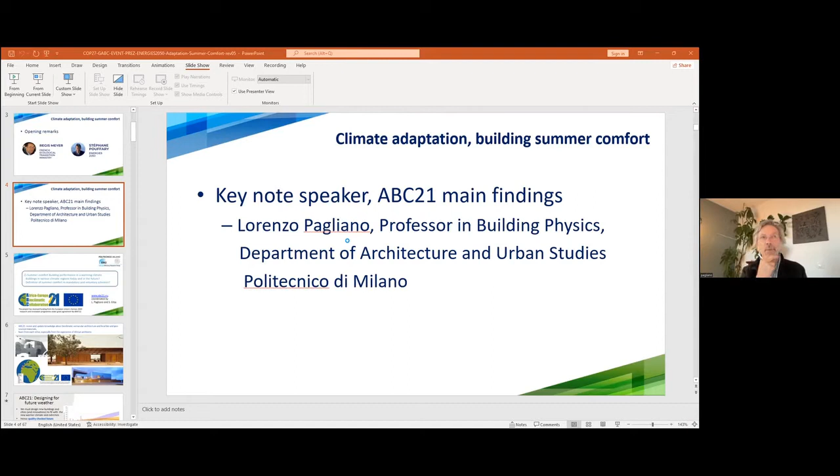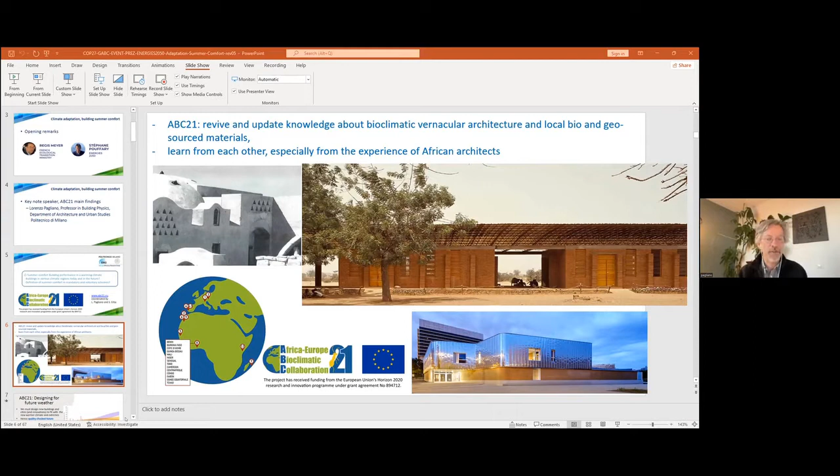In any case, this project involves a number of countries in Europe and in Africa, both academics and ministries, and also practitioners, architects and building construction.

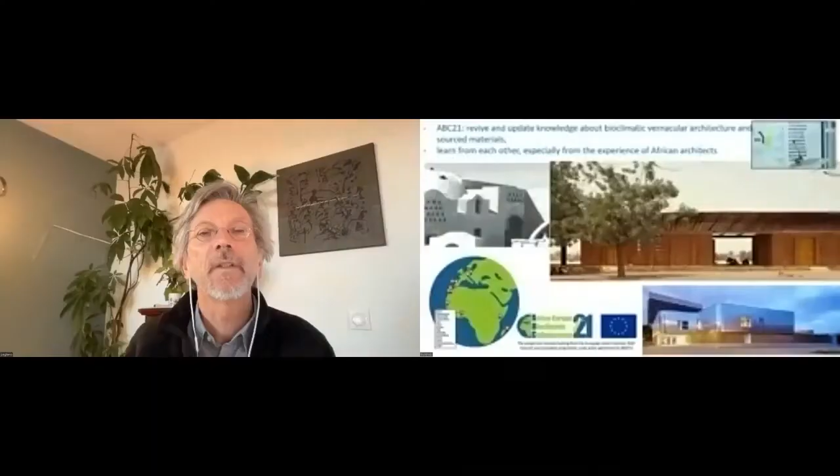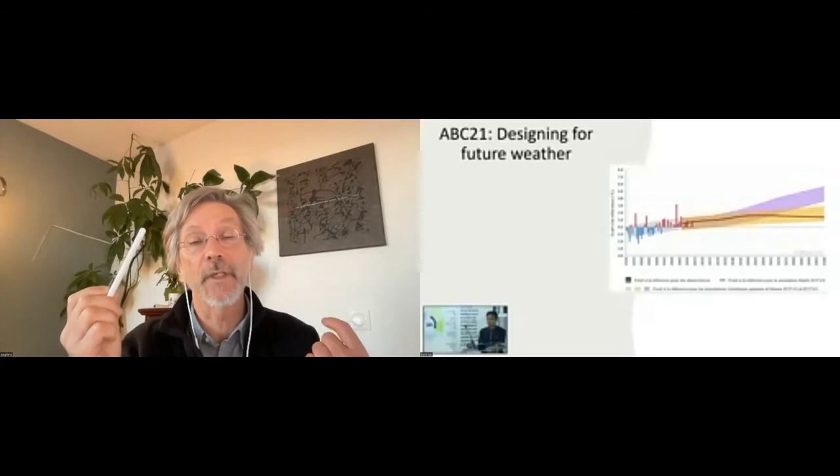One of the goals is to design for the future weather. For this, we need to anticipate what will happen in the next decades, rather than using as input for simulation and calculation weather data referring to the past, as it happens mostly today. We need this description of the future weather, accurate or approximate, and available publicly and certified publicly.

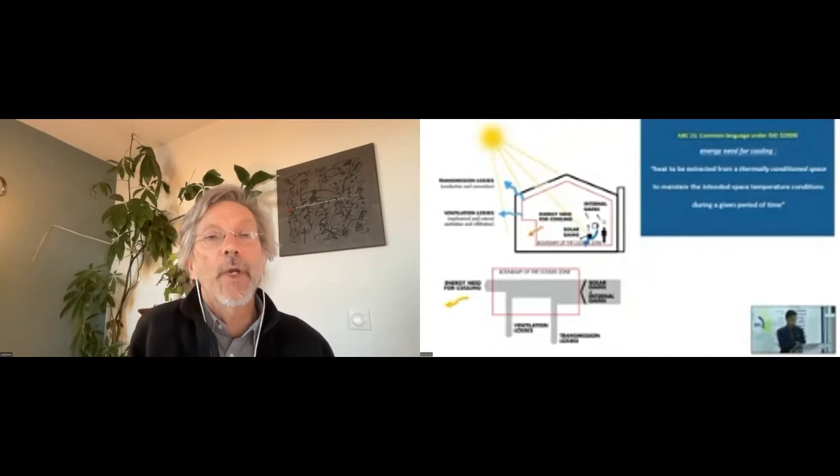There are some building codes which already use these indicators, energy needs for heating and cooling. For example, in Morocco, the building code limits the energy needs for heating or cooling, focusing on the envelope, as it should be, for a number of reasons. In Switzerland, it is mandatory to have a low value of energy needs for heating, and mandatory to have solar protections and minimum thermal mass, and only after that do you have permission to install active air conditioning if still needed.

There is another parameter called net zero energy or net zero CO2 balance over a year, which is sometimes used in a misleading way. If you do a virtual balance over a year, you can get zero, taking the difference of the energy the building uses minus the renewable energy generated at the building site over a year. But in the different months, the balance is not there, so you need seasonal inter-storage - storing energy today and using it six months later. This requires a lot of materials, land, and implies losses which in many cases are not counted into this paper balance.

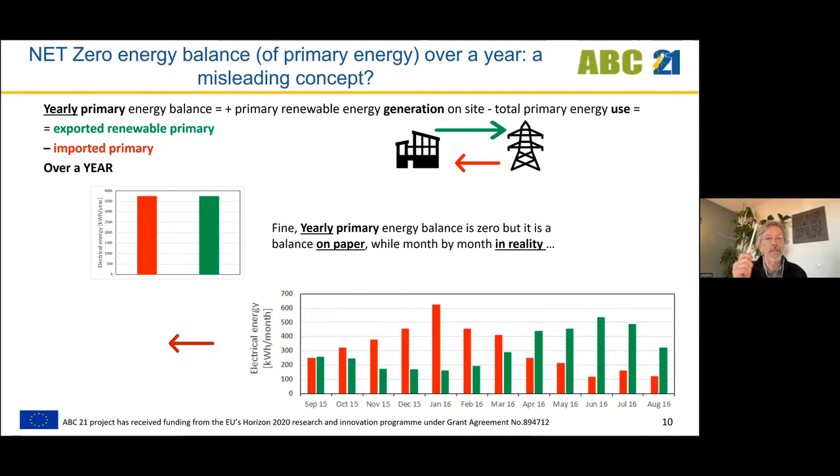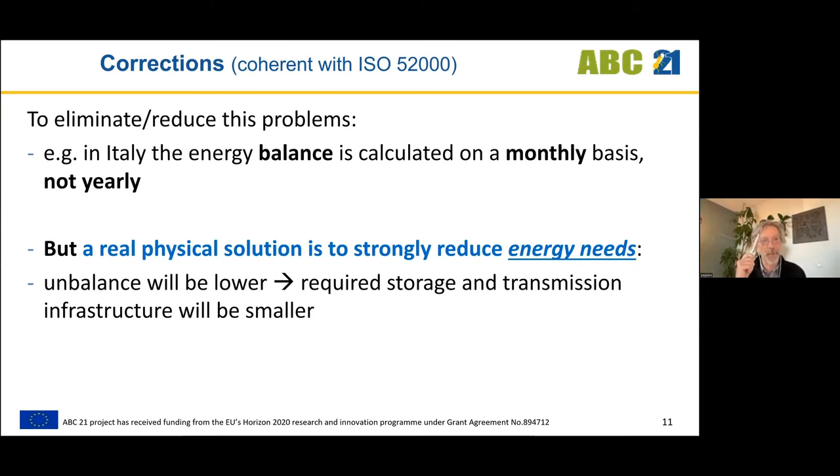We are already on the next point with the corrections I was proposing: calculate on monthly or hourly basis. What's needed is to reduce the energy needs with a very good building envelope.

We also need to use comfort indicators. What is done to define comfort is to do simultaneously measurements of temperature, air velocity, radiant temperature, and interview people asking how they feel at this time, requiring an answer standardized on a scale from cold to hot.

Tens of thousands of these interviews have been done and are collected now in the ASHRAE Comfort Database 2nd, published in 2018. We have participated in this work. In Africa, we will add new data with new measurements we are running now under the project ABC21.

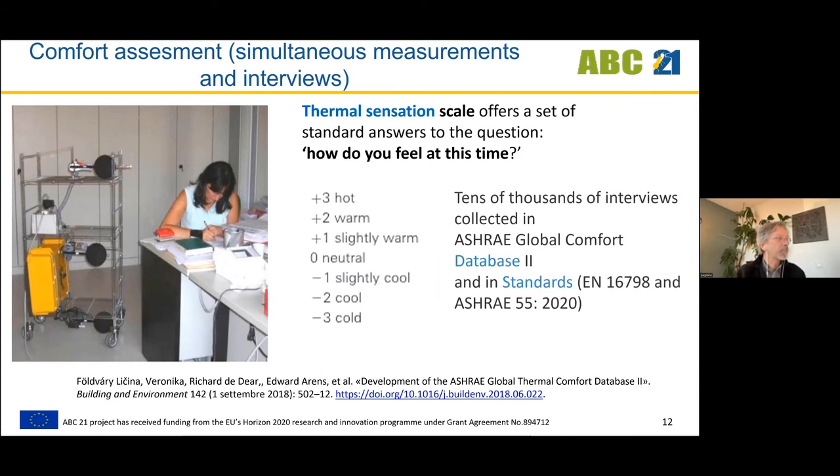One important parameter is air velocity, shown by these measurements and interviews. We knew from experience that if we have air velocity indoors, the comfort zone goes to higher temperatures. So you can be comfortable at 28 degrees with air velocity as much as at 24 with no air velocity.

This is an example of a building in La Réunion where, in the classrooms at the upper floor, there is cross ventilation to provide this air velocity, along with ceiling fans. At the lower floor offices, they have available cross ventilation, ceiling fans, and a bit of air conditioning, and they can mix these three ways to achieve comfort, even using air conditioning at high settings, keeping the temperature relatively high, combined with air velocity. This seems to work well, and the response of the occupants is documented in the paper shown below.

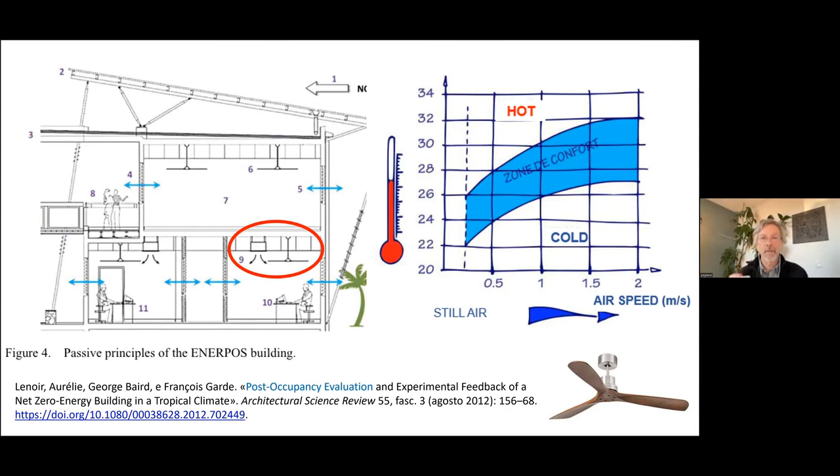This is crystallized in the norms now in a very explicit way that allows calculations to include this easily. We will not go into details, but you find them, for example, in ASHRAE 55 or the European legislation.

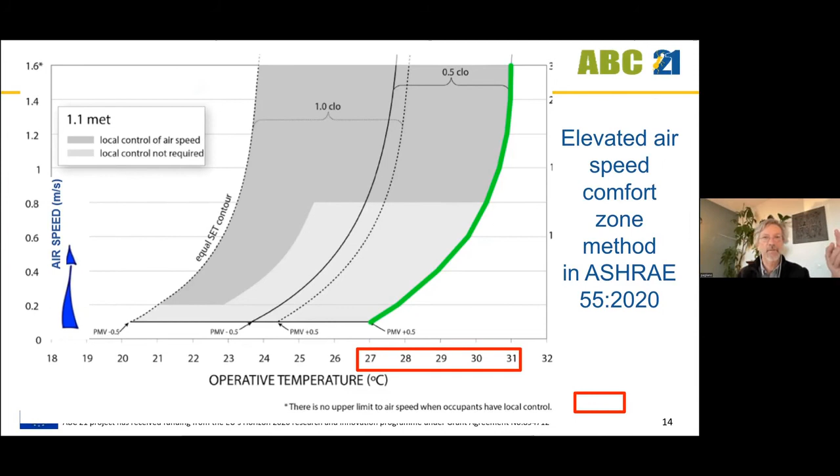Again, the analysis of the database shows examples where people have been interviewed in large spaces. These large spaces can also be made comfortable via the use of large ceiling fans, as in this classroom by Francis Kéré, winner of the Nobel Prize for Architecture, the Pritzker Prize, in 2021. There are ways to calculate how to distribute velocity with the ceiling fans for designers.

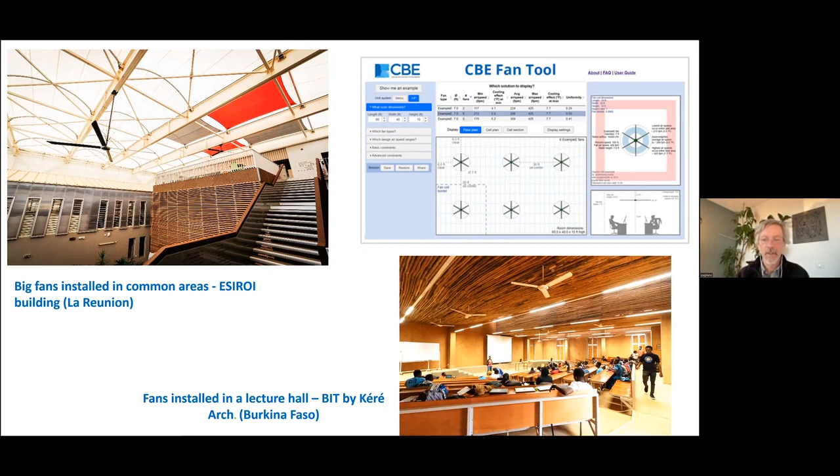Cross ventilation is included in the design of many buildings of the new wave of African architecture, like this school from Francis Kéré. So ventilation is used for daytime comfort and for night cooling.

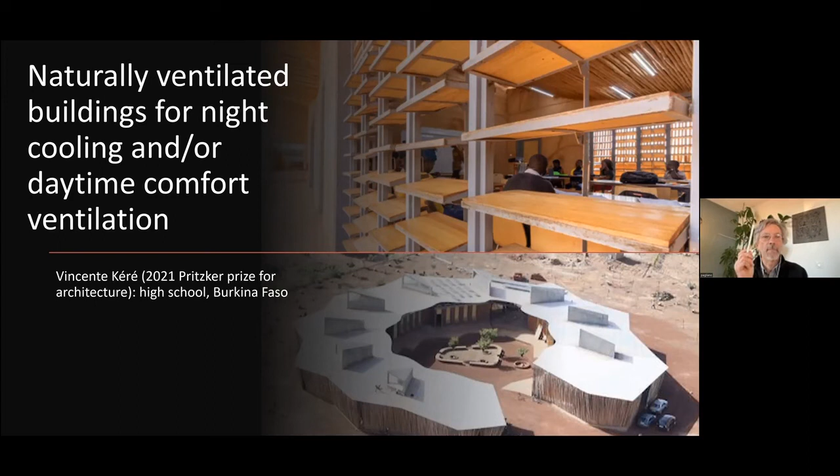For example, these residential buildings have been designed with a shallow depth so that cross ventilation is actually possible, and the surroundings are designed for no cars at surface level, no noise, and the possibility to open windows at night without disturbances. This is in La Réunion.

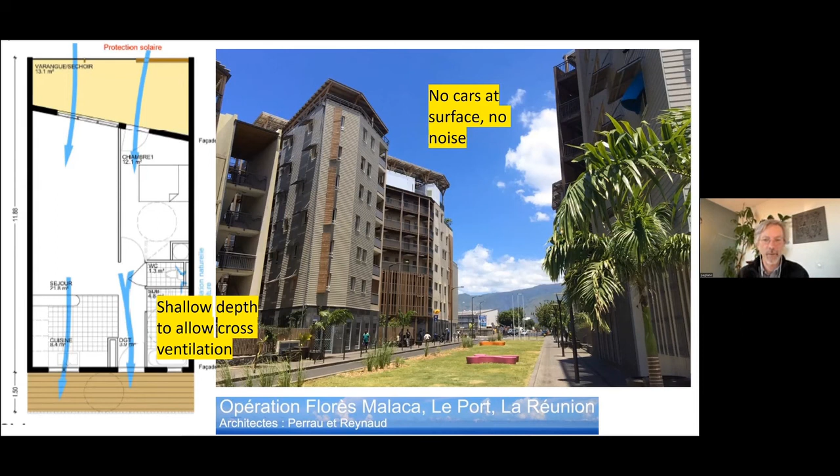Because time is running, this is almost the last one. We can measure and document what comfort is achieved. For example, in one case study of the ABC21 project, we have a residential building with 25 centimeters of external insulation, high thermal mass, and natural ventilation. It's in Sicily, so a warm climate for Italy.

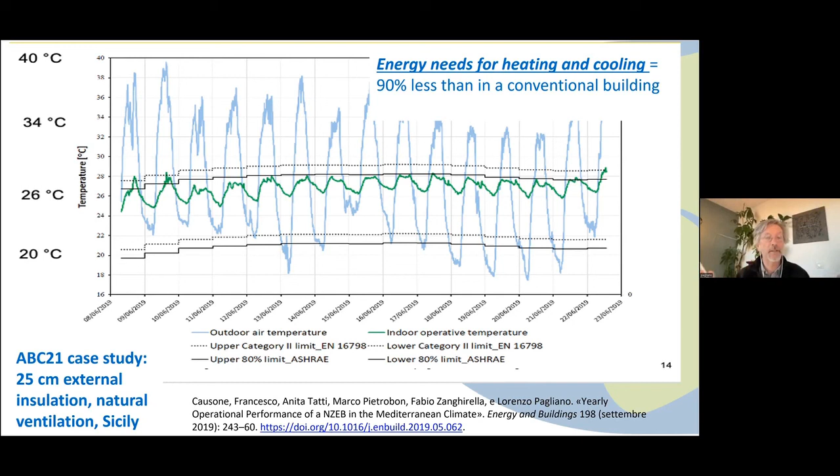The blue line is external temperature, which goes up to 40 degrees Celsius on certain days. The green line is the indoor temperature with no air conditioning active, so only with natural ventilation and thermal protection. The indoor temperature oscillates between 25 and 26, 27 maximum, so within the comfort zone, and the energy need for heating and cooling is 90% less than in a conventional building.

The comfort lines you have seen changing over time are described via the adaptive thermal comfort model, which again comes from those tens of thousands of interviews. The model says very simply that indoor comfort requirements, the temperature required by people, grows with the external temperature. So the higher the temperature outside, the higher the required temperature inside, which helps to design passive buildings rather than keeping strictly 23 degrees constantly, as we sometimes do.

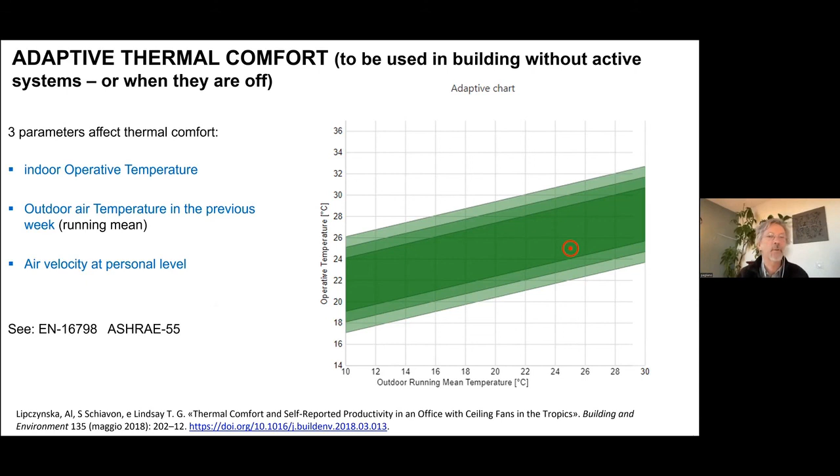Adaptation and mitigation in buildings are probably the same thing if we do a good envelope. Good envelope helps to cope with extreme events, to give thermal safety, and to achieve very low energy needs for heating and cooling, so low CO2 emissions.